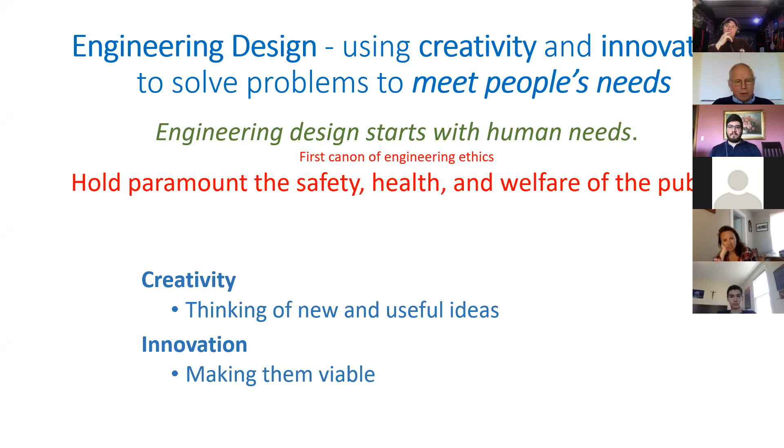Anyway, so we talk a lot about creativity and innovation. Creativity is thinking of new and useful ideas, and innovation is making them viable. I'll try to work or maintain this theme here as we go along.

First, a word about engineering design. Lots of people think that the drawings that we use are the designs. They're just one representation of the design. And the interesting thing for me in looking at design theory is, where do these come from? How do we get these ideas? And how do we develop them into such sometimes intricate drawings?

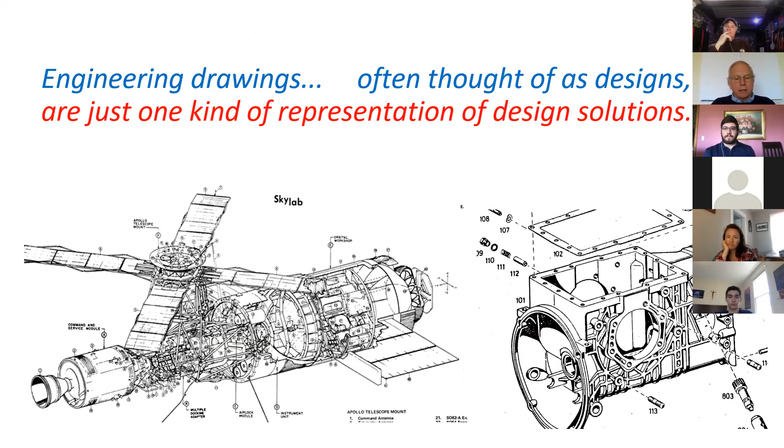So engineering design, it's conceiving, planning, comparing, selecting components and systems. And so engineers create value by thinking. As I point out to my students, we don't really have to do anything. We just sit and think, and then we need to provide some representation of what we've been thinking about, I guess, especially if we want to get paid.

And so thinking about thought, and Descartes: je pense donc je suis. I think, therefore I am. And he comes up with Cartesian coordinates, and he did quite a bit of good thinking. But then thinking about thinking, metacognition. And this is essentially what design theory is. Thinking about, how did we come up with this? And that goes back even further to Aristotle.

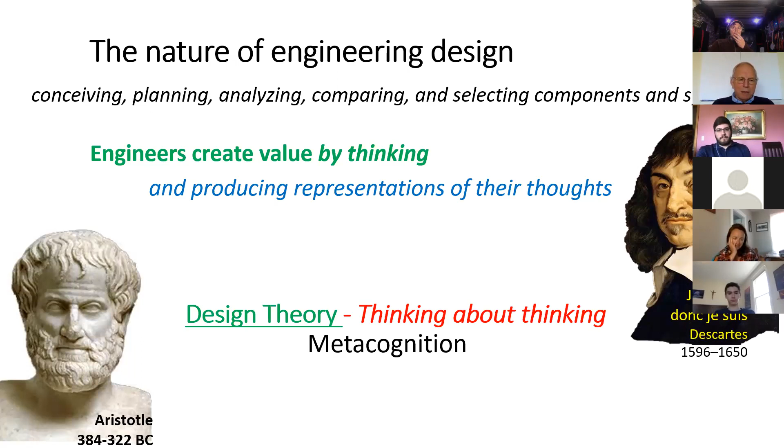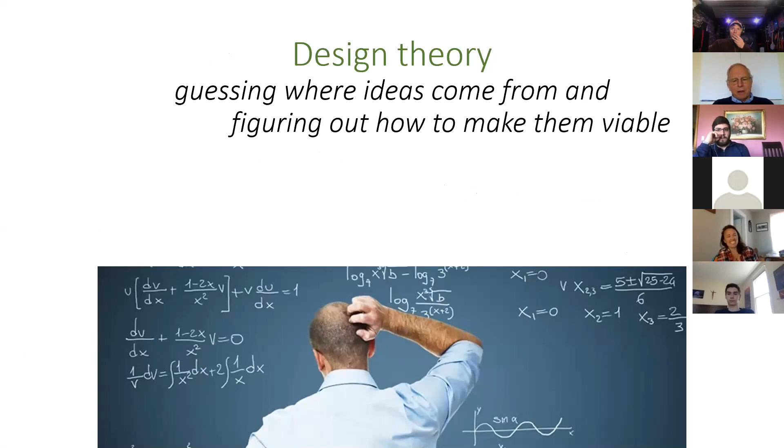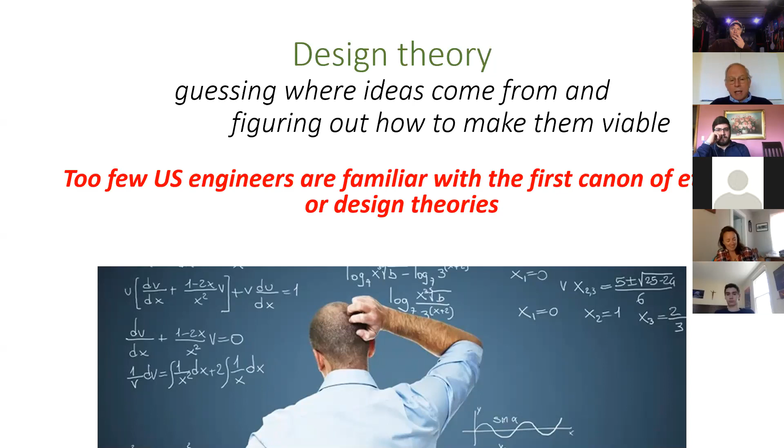So I kind of think of design theory as trying to guess where ideas come from, and then figure out how to make them viable, how to make them work, how to make good innovations. And as I mentioned, too few engineers are familiar with the first canon of ethics, or with design theories, interestingly enough, since that's what it is that engineers do.

So engineering design starts with needs. And it became clear to me, so I coached and have done a bunch of athletics, that we were having way too many injuries when I looked at this book that came out in 2008, Warrior Girls. And the chance of tearing your ACL, if you're a high school girl athlete as opposed to a boy, is 7 times greater doing similar sports like soccer. There's a lot of questions about why, and nobody really knows, but the idea was, let's try to find a solution to this. And here's some statistics on these, and they're alarming.

I think it's like every 2,000 times a high school girl basketball player steps on the court, she'll tear her ACL once. And so that means most high school girl basketball teams are going to have at least one ACL tear every couple of years. And when you talk to people, that seems to bear that out pretty well.

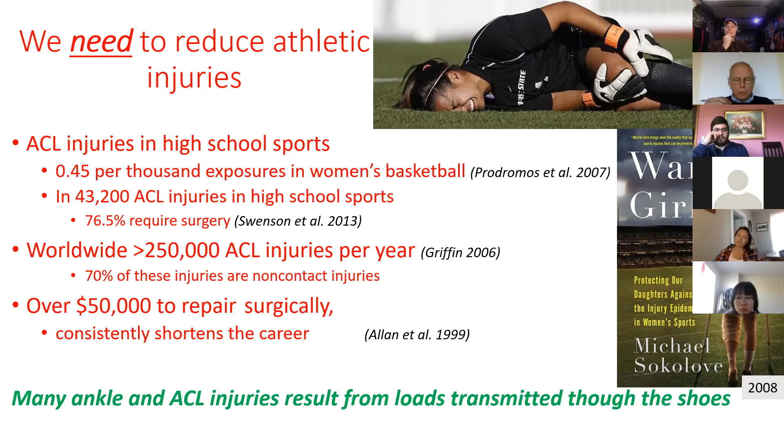So how do these happen? I start thinking about it as an engineer, and many of the injuries occur from loads that are transmitted from the floor or the field through the shoe to the person. And that's where we have an opportunity to do something in the shoe.

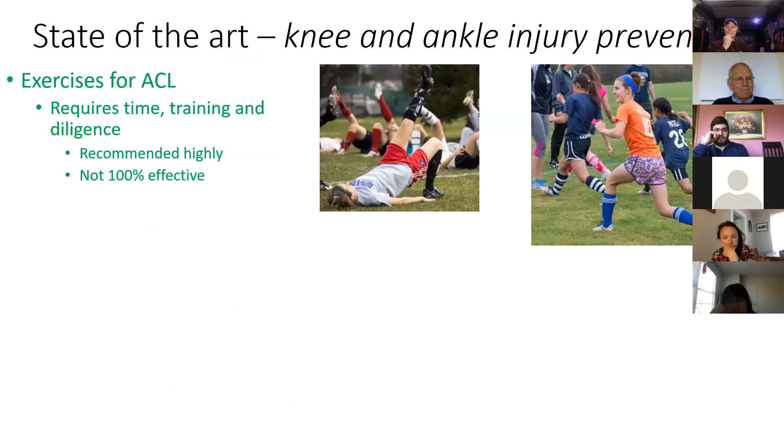But so what else might we do? And so what's going on now? The exercises and trying to strengthen your knee to prevent injuries are a great idea. They work, but you need to do the exercises, and they're not absolute. Ankle supports, and some of these expensive shoes have got all kinds of ankle supports built in, and that's nice, and that can help the ankle, and so can taping.

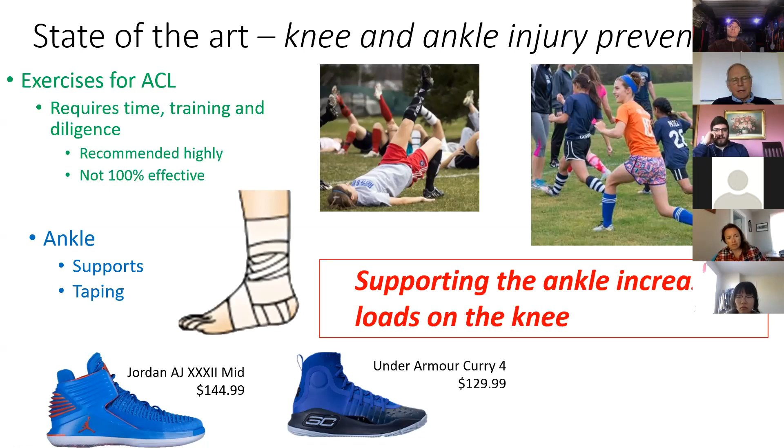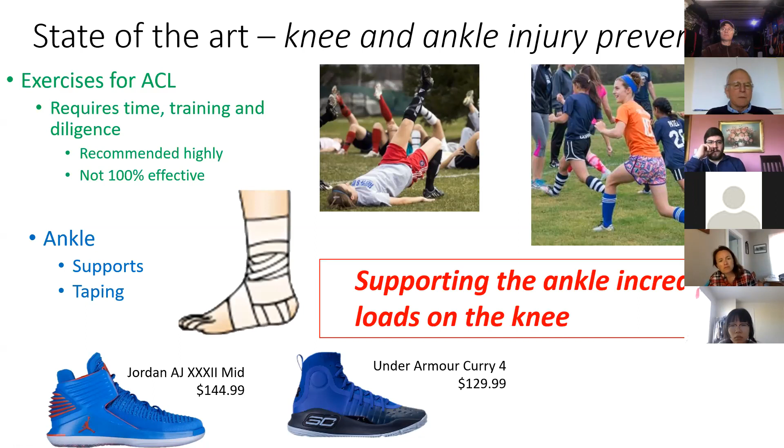But the problem is that as we support the ankle, we increase the loads on the knee. One of the things the ankle does is absorb loads before they get up to the knee. And so it's been noticed that if you tape the ankles, sometimes done as a prevention to keep the ankle from getting hurt, you tend to have more knee injuries. And we see a similar thing in skiing when the ski boots started to get higher now about 50 years ago.

So design theory, I'm going to talk mostly about a different kind, but I want to mention this. These three professors from the École des Mines, or Mines ParisTech, were teaching innovation and design to industry, and they developed this, and I think it's a nice theory. They talk about dividing the engineering design problem into two spaces. One is the concept space.

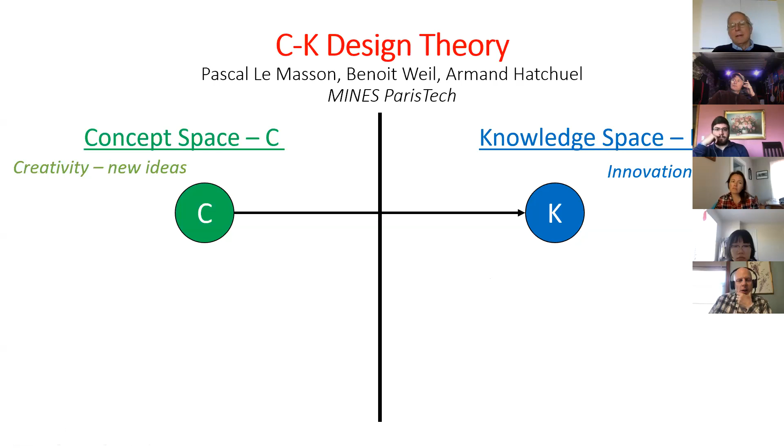So we get some idea as a concept, but then to execute this, we need some knowledge. Sometimes that knowledge already exists and all we have to do is find it, and sometimes we need to develop it. Ideas may have children, and we may need other knowledge to develop this, which may lead to something else, and you get the picture. The main idea is that we have concepts we'd like to use to make products, processes, or systems that are going to be useful, and we need knowledge to turn this into an innovation and make it viable.

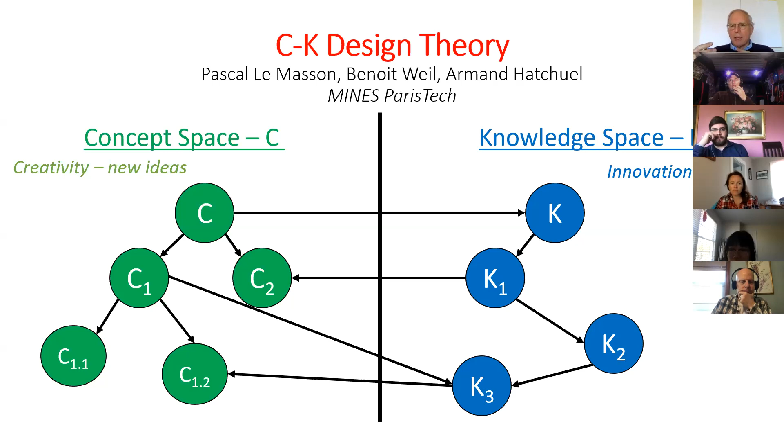So we ask sometimes, where did that concept come from? In the case of what we're doing with the shoes, it comes from ski bindings.

I had the good fortune to work with some guys at the University of Vermont: Bob Johnson, who's an orthopod and is now retired, Carl Ettinger, who's an engineer, and their associate Jake Shealy, who's at RIT in Rochester. They've been studying injuries at Sugarbush North, back when it was still Glen Ellen, years and years ago.

This is an interesting trend here, showing tibia fractures. Starting off, tibia fractures were not far off 1 out of 2,000 days, and there were a lot of them. Release bindings had actually been invented in the late 30s, but there were problems getting them to operate properly. Finally they got the friction out and got everything working, and you can see a dramatic improvement. This shows days between injury on the left and the ski season on the bottom. So now these tibia fractures are very rare and often associated with some clear malfunction in the equipment.

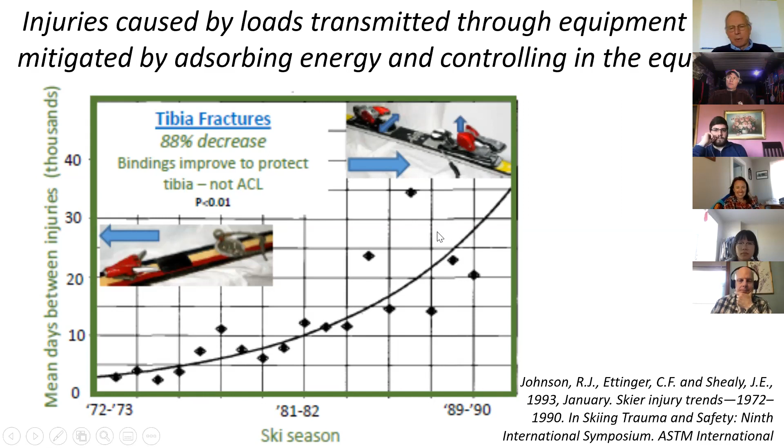The theory that really captured me when I was a graduate student was Nam Suh's. He came to the University of Vermont and gave a talk. Nam was a professor at MIT at the time. He went on to be at the National Science Foundation in charge of engineering, chair of the mechanical engineering department at MIT, and then president of KAIST, which you may not have heard of — it's the number 2 engineering school now in Asia, the Korean Advanced Institute for Science and Technology. Nam was originally from Korea.

His father was a professor at Harvard, and he got stuck in Korea during the war just before he was going to join his father. Anyway, he goes to high school in Cambridge, Mass, then to MIT, then Carnegie Mellon, and then comes back to MIT to teach. He's now retired and lives in Massachusetts. His first honorary doctorate, out of 8 or so, is from WPI.

And the axioms he discovered in the 70s — he was looking for commonalities in good designs. He started with the premise that there should be self-consistent axioms that apply to all good designs, certain things we would use to get the best solution for all design problems. An interesting position, and many people disagree with it — they think no, it's just creativity, we've got to think outside the box, and ideas just come to us.

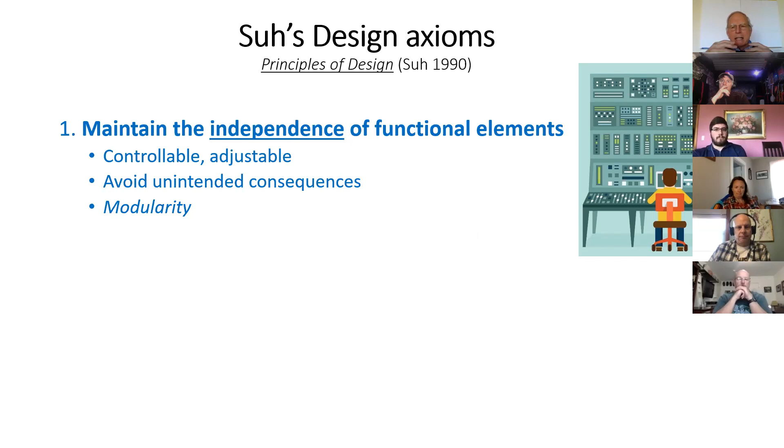So let's take a look at the axioms. These are two things he said are common to all good engineering designs. One is maintaining the independence of the functional elements. Function is important, and we're going to develop this a bit. If they're independent, they're adjustable and controllable, we avoid unintended consequences, and this drives us to modularity in design.

The second is minimizing the information content. Too much information — poor Homer Simpson here is suffering from too much information. Don't confuse information and knowledge; information content is about the probability of success. If there are too many instructions, for example, to accomplish some task, the chance of successfully accomplishing that task goes down as the number of instructions goes up — somebody's going to misinterpret or forget one and not be able to make it work. So the message here is to avoid unnecessary complexity.

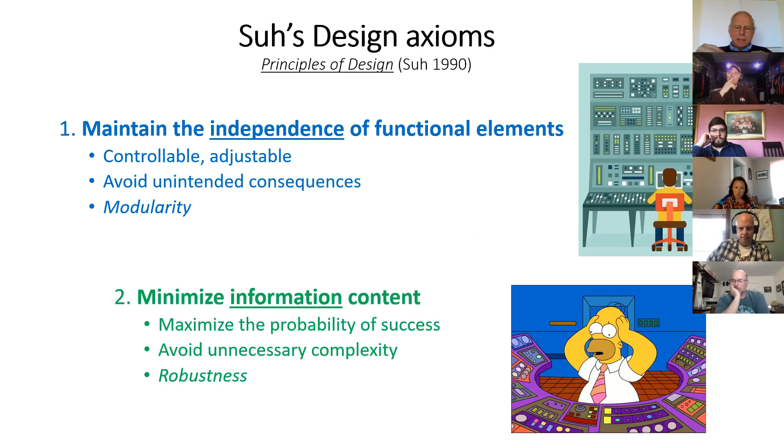Lots of designs have to be intricate because they're doing so many things, and this leads us to robust designs. A lot of people say, oh, those are simple, it's just common sense. Well, if it's common sense, then why aren't more people aware of it and using it? I like this philosopher, Karl Popper, who noted why simpler is better: simpler things tell us more, their empirical content is greater, and they're easier to test.

In order to apply the axioms, we need some sort of structure. Just as if we want to apply Newton's laws, we need a free body diagram, we need some sort of analogy in design. So we like to divide things into spaces, as we could already see from the CK theory. Nam came up with these design spaces, which are quite useful and appropriate.

We start with the customer needs, just as we were looking at the shoe, and we need to do something about all these injuries. Then from those, we derive functional requirements—this is what it does, and these must satisfy the customer needs. Then we go on to design parameters in the physical space—this is what it looks like. The design parameters have to fulfill the functional requirements. We could also talk about the processes, the process variables, so we can manufacture things, but we'll save that for another day.

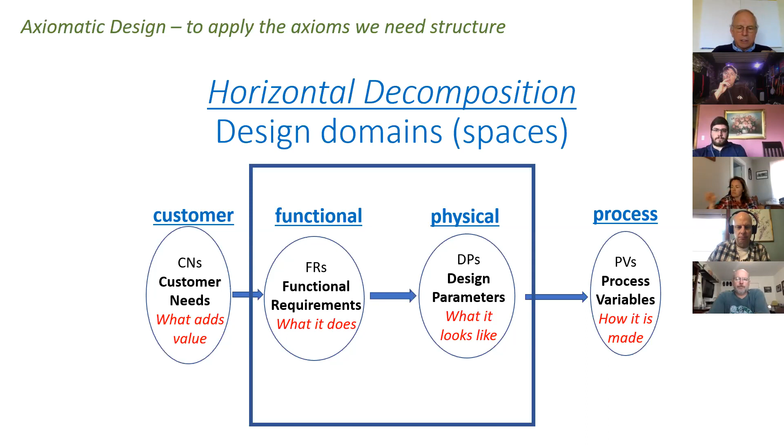Mostly what we want to focus on now are the functional and physical spaces, although we'll get on to customer needs too in a bit more detail towards the end.

Design thinking—we hear about this a lot, and I don't know what it really means when most people use it. But I like to go back to form follows function. This American architect, here's one of the buildings he developed at the end of the 1800s—quite a departure from conventional architecture, which was more ornate and had a lot of aesthetics built into it. This is: let's get the function.

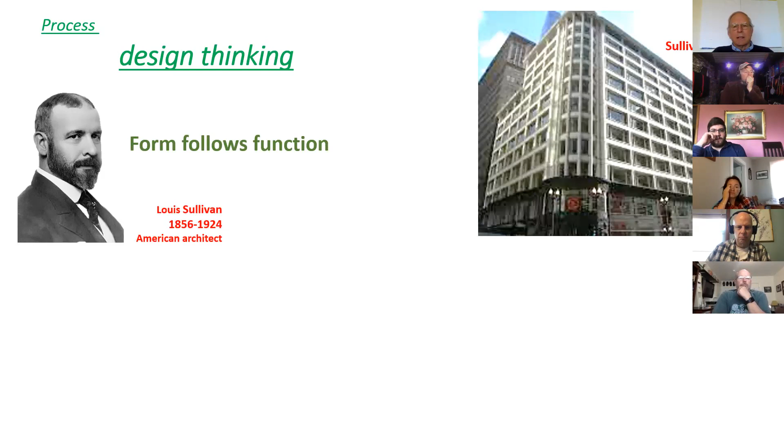Axiomatic design too is form follows function. So we develop the functions first, the functional requirements based on the customer needs, and then select the form, or the design parameters.

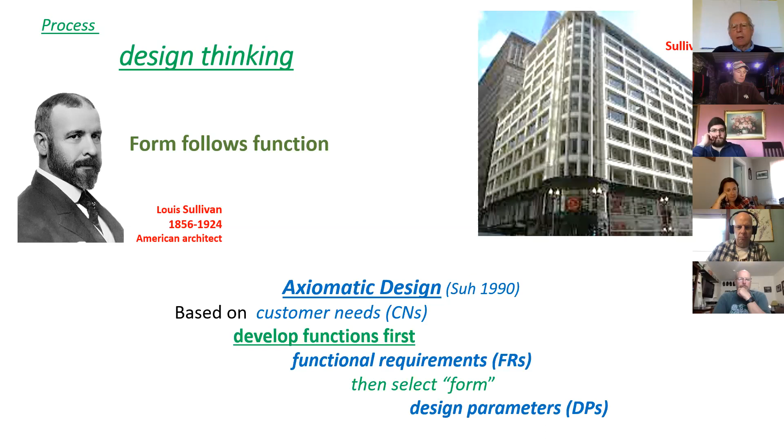So let's get back to our problem with the injuries. There is a need to reduce the injuries, and the cost of these is something like $10 billion a year for high school and college in the United States—almost enough to pay for a pandemic.

The shoe is getting loaded from the movements of the person, and we try to work for better and better traction on the shoes so we get better and better performance. We don't want to mess up the performance, but we don't want to mess up people's knees either. So let's control the load transmission through the shoes so that without diminishing the performance, we can avoid injuries.

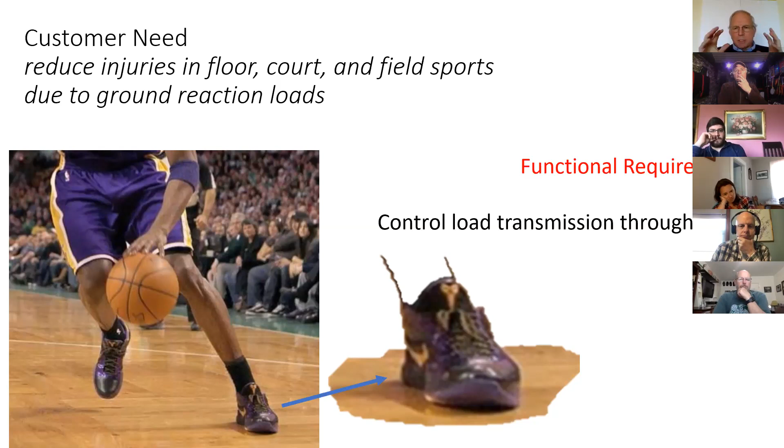Our first FR at the top level is always FR0. So FR0: let's absorb somehow these potentially injurious loads to the knee and the ankle in the shoe.

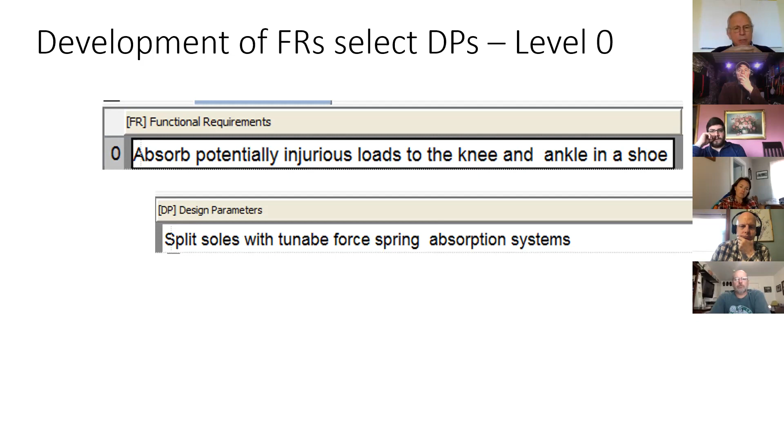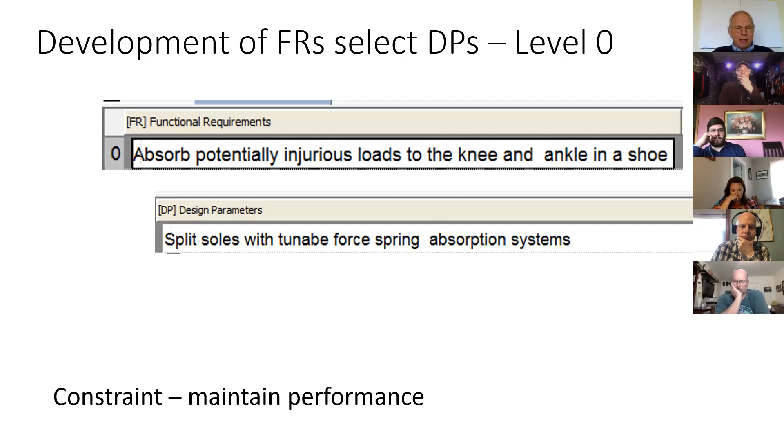What we turn to is a special sort of split sole, so that the bottom part of the sole is for the interface with the court or the field, and the next part is to hold the shoe upper and the foot. In between the two, we're going to use tunable springs. The constraint we have on this is to maintain performance—through extensive experience in athletics, I know that nobody's going to use a shoe, even if their knee is a lot safer, if it diminishes their performance.

A little bit more on the structure: we have these different domains, which is a kind of horizontal decomposition of the design problem. Now we're going to decompose it in hierarchical fashion from abstract to detailed in these parallel vertical hierarchies between functional and physical. So what we're looking at here is a series essentially of parents and children as we decompose, say, FR1 into its three parts, FR1.1, 1.2, 1.3.

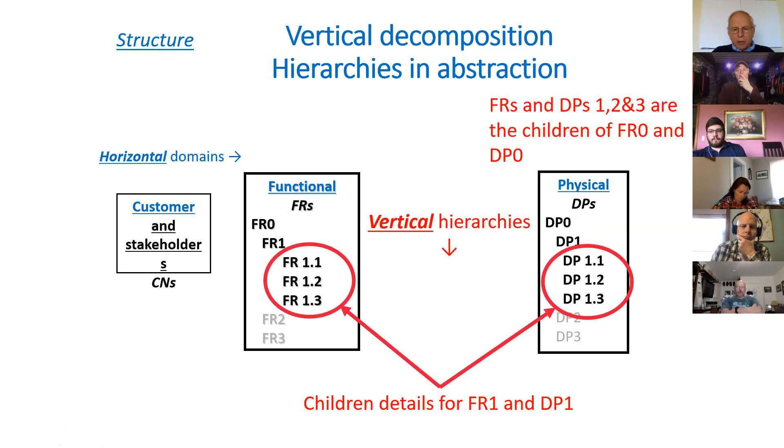In parallel, we have the same sort of decomposition in the physical space, but this is describing the functional space, and this is describing the physical solution to the design problem. So there are the children for FR1 and DP1, for example.

We need some process also for creating this decomposition. Because we're going function first and then physical, it's called zigzagging. First we get the function, then the physical, then we go down to a level of detail and do the next level, function to physical, and so on. We keep decomposing like this until the solution is obvious.

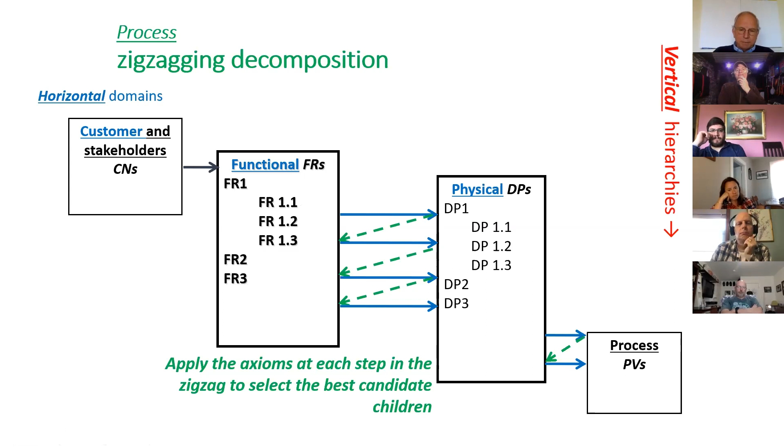So we can look at the decomposition like this, and it's not much different than cutting up a pizza or something that you're going to eat. You can't get the whole pizza in your mouth at one time, so you split it up somehow, and then you split it up again when you bite off pieces of it. So that's kind of what we're doing with the design problem.

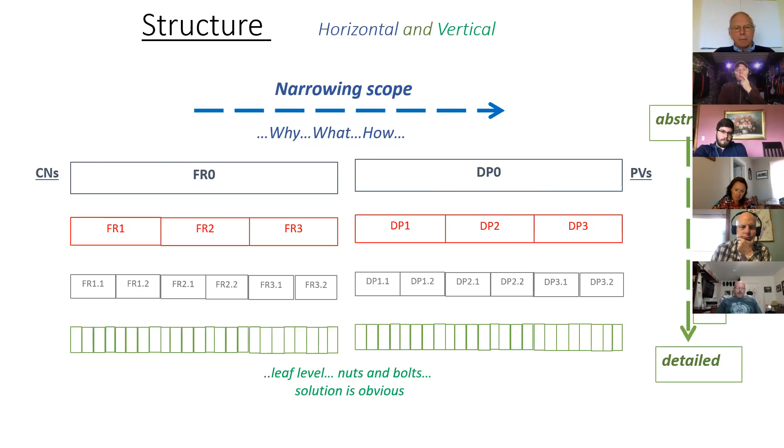This decomposition process is key to doing any kind of problem. I think it should be something that is taught from a very basic level, but we don't. But sometime we should. Now, there's lots of rules that help us in the decomposition.

Lots. There's a few that are good to remember. One is when we're talking about functions, they start with verbs and they're stated in the imperative. So it's a command. So you need to do something, accomplish something, provide something.

And we would like the minimum number that we need to satisfy the parent, or satisfy at the top level the customer needs. So we want to make sure we think of everything. So the decomposition should be collectively exhaustive. When we take all the FRs together, we should have the problem solved at each level of detail. And at each level of detail, the FRs should be mutually exclusive, so there's no overlap or redundancy. So we have a good, clean, full decomposition, but no more than we need. And the little mnemonic is C-M-min: collectively exhaustive, mutually exclusive, minimum number.

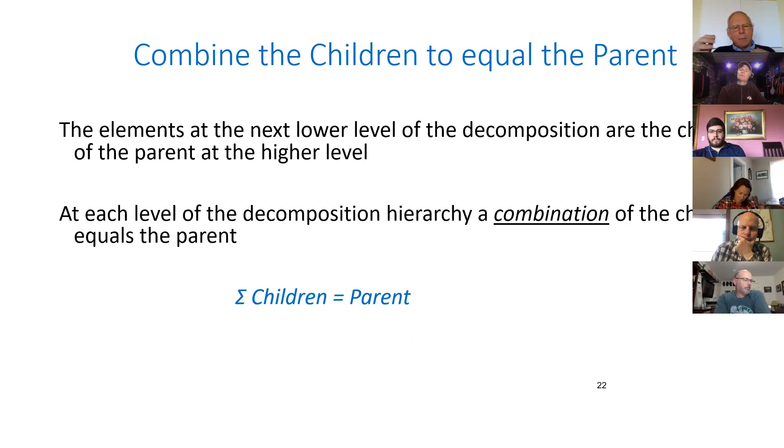We also, in the decomposition, another way of thinking of it is we want to somehow be able to combine all the children to equal the parent, exactly. No more, no less. This would mean we have a good decomposition. Now, I have a summation here indicated, that the sum of the children equal the parent, but it's any kind of combination, doesn't have to be a summation.

So concept. So going back to the concept knowledge from CK theory, from our friends at the École des Mines. So split soles are going to be embedded with tunable springs that will control the ground reaction forces. So this is going to mitigate the loads on the knee and the ankle, even with ankle supported taping. So we can avoid putting the knee at more risk by when we save the ankle.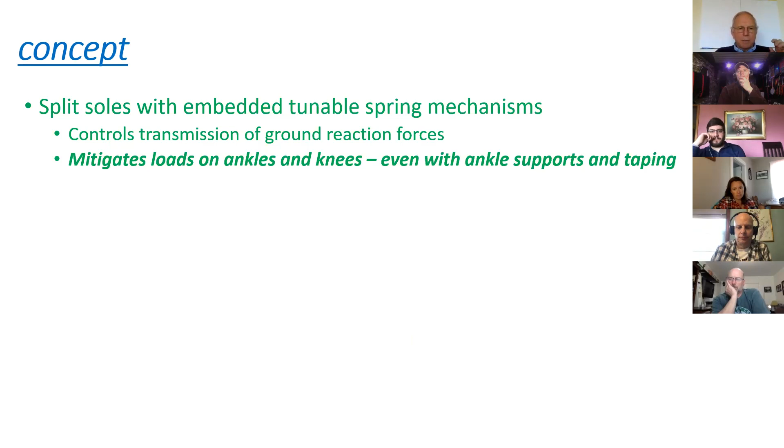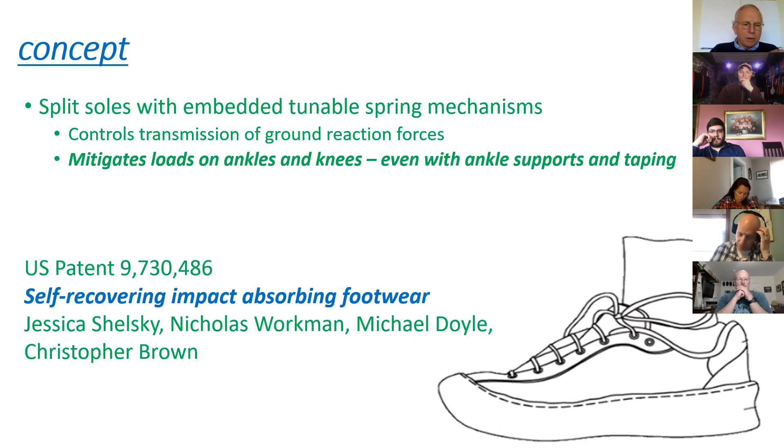So we started on this problem not long after that book came out with a team of undergraduates working on their MQP, major qualifying project, which is what WPI calls the senior thesis in engineering. So in undergrad, for the undergrads. And these three did a great job. And so we filed for a patent.

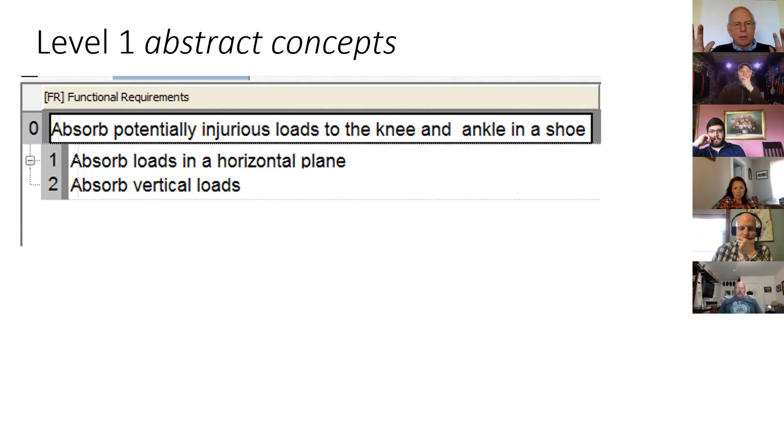And so here's a little bit more on the decomposition. So functions first. We want to absorb the loads in a horizontal plane, and we want to absorb the loads in a vertical plane. Because we look at videos of the injury, and lots of times somebody's coming down from blocking a shot or something and trying to make a cut, and that's when they injure their knee.

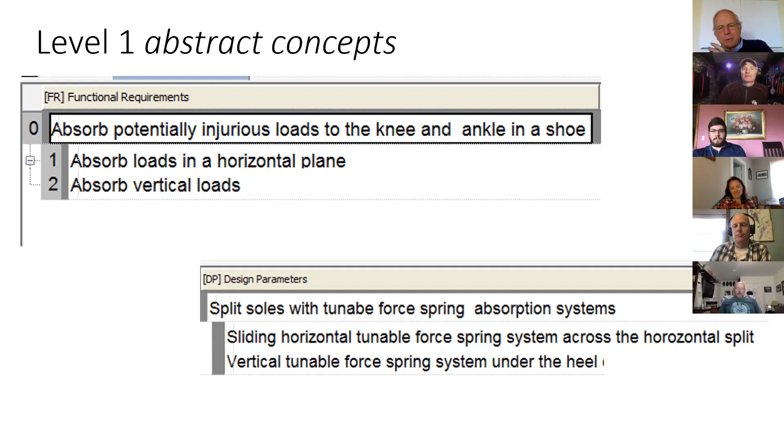So the physical solution is these sliding horizontal soles with tunable springs. And so we have these horizontally, and we also have a spring system vertically under the heel. So the idea is we should be able to absorb in both directions, or both senses, horizontal and vertical. So here are some frames from a video of the prototype that we made for the MQP.

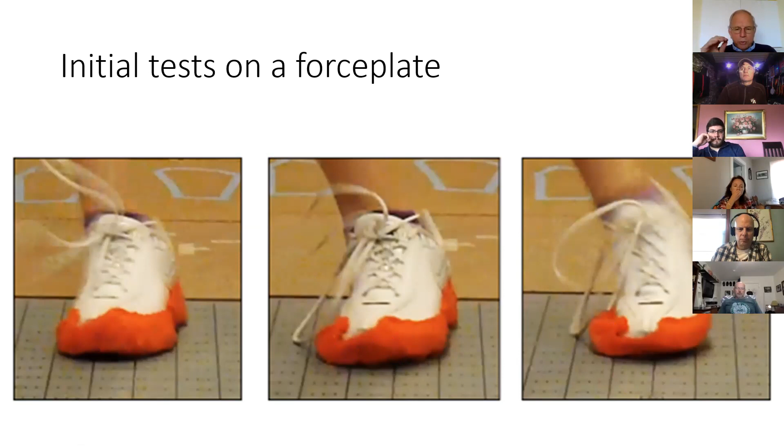But this got put on hold for a few years. We tried to sell it to shoe companies. And the established companies seem to be a little bit risk averse when it comes to investment in new technology. Not just the shoe companies, most of the big companies are. We could speculate on why, but anyway, it happens.

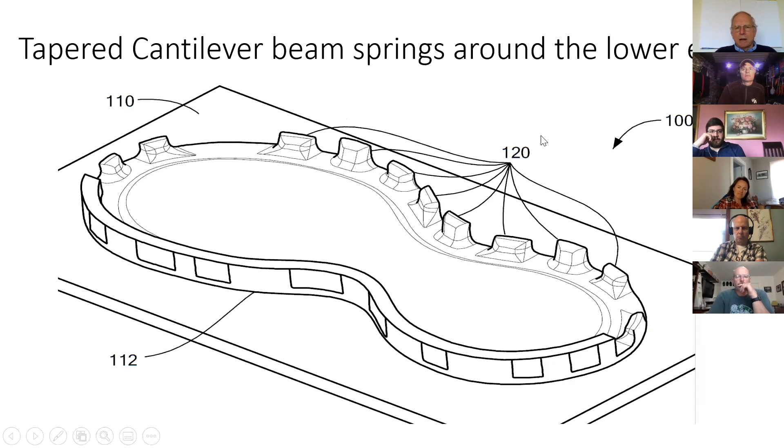And so these would get pushed over in different fashions. This is a drawing out of the patent, and it's terrible. It shows a sharp corner there that should be rounded. This thing's supposed to be bending over.

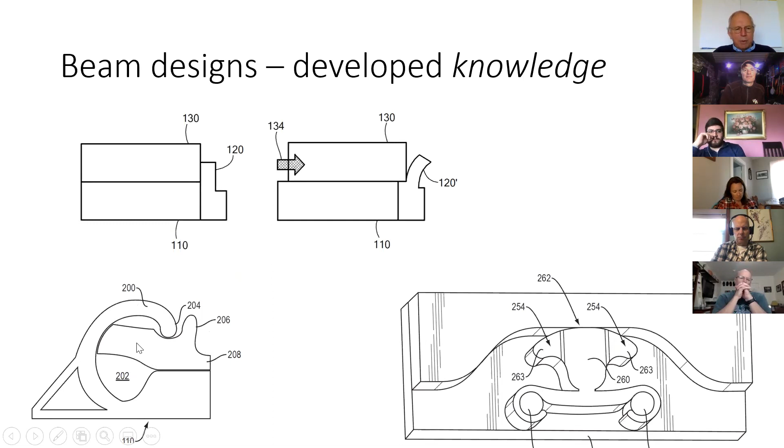But here's the problem, and we needed some new knowledge. Conventional springs are linear. This goes back to Hooke's law. Hooke was, I've forgotten what century, but it was years ago. He discovered when you pull on most things, they stretch a little bit in a linear fashion.

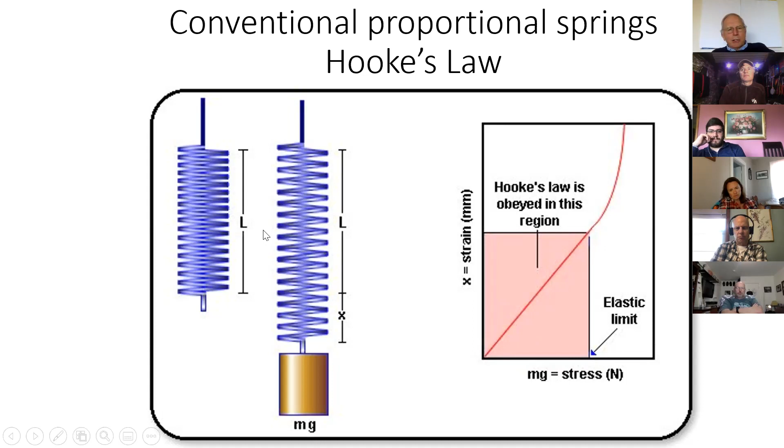So this is a coil spring, but it could be any kind of spring, or it could be just a wire, and you put some weight on it, and for a while it will deform what we call elastically, and then spring back. And then either the spring stretches all the way or bottoms out, and the loads start to go up.

So if we think about this in terms of our problem here of, let's say, reducing the risk of injury and still being able to do ordinary play, let's take a look at a plot of the load here. So this could be a force or a twist, and the displacement, which could be linear or angular.

So if we look at the load levels, there's a certain level that we need for most ordinary play. And then above that, there's some load where we start to have some significant risk of injury. We know they're oriented like this because most of the time we go out and play without getting hurt. Otherwise, we wouldn't do it.

So if we look at a linear spring, a Hooke's law kind of spring, the load is equal to some constant times the displacement, and it just goes up like this. And this would be all kinds of springs like on a pogo stick. I don't necessarily want a bouncy kind of feel.

And so like ski bindings, preload the spring so that it doesn't start displacing until I get up to some pre-adjusted load, say L0. And then I'd like to kind of flatten that out so I've got a longer time before I start risking injury. And if the ski binding's working properly, it'll release somewhere in this window before we actually get hurt.

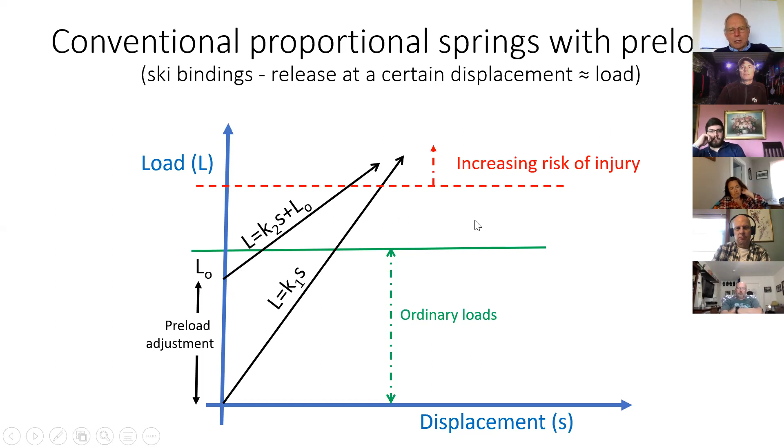Now, what we would like more than this would be to have a spring that goes up and then flattens out somehow. So we would like a nonlinear spring, because this is linear where it just keeps going up. So this would provide us better protection.

And if we can double the displacement, this comes out of a kind of work energy formulation for those of you who are taking physics and mechanics. So if we can increase the displacement, say S, by a factor of 2, we can reduce the forces that are necessary... in the energy, let's see. If we double the displacement, we can reduce the forces essentially, and provide more protection.

So what's happening is some initial linear kind of displacement, perhaps, or stiff load, so that we can make the different maneuvers we want to when we're playing. And then we want to get into a protection mode where we're able to keep loading at a safe sort of load so that we don't have a release.

If you had a release, you say, uh-oh, we're approaching a dangerous thing here. It would be like you stepped on a banana peel and you'd kind of skid out. So what we really want is something that'll allow us to maintain an approximately constant load at a safe level, and then absorb as much as we can, keeping the forces low, and then recover when we pick up the foot. So whenever what we're doing is over, and it will get over because we can only extend our legs so far, and it'll recover before the next step.

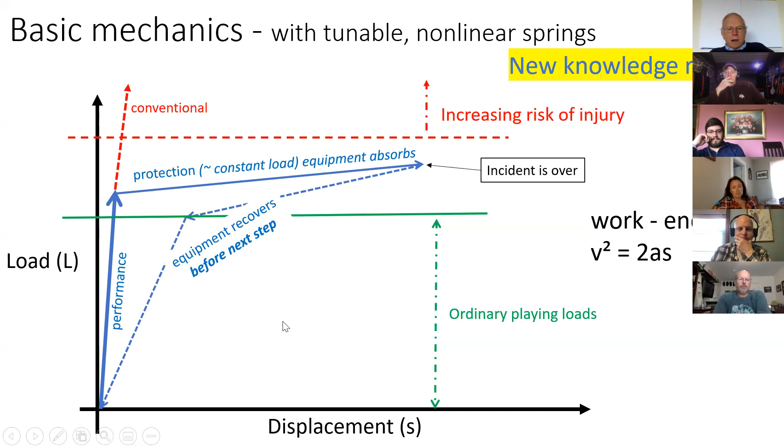And we may not even know that the shoe has saved our ACL. Actually, we prefer that we didn't really know, so that we can go on playing without any interruption.

So we can look at the work here that's absorbed and come up with, if we can double the displacement, we cut the force in half. And actually with this kind of shoe, since nobody's paid any attention to horizontal displacements like this, we can do better than doubling it.

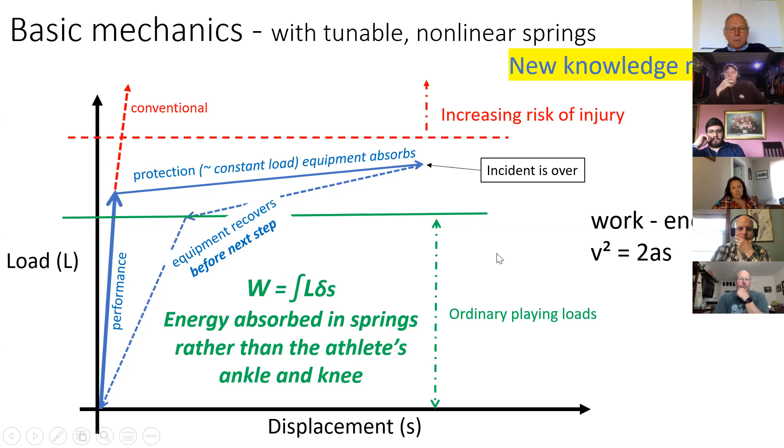We can also look at an impulse momentum kind of formulation. This is the integral of force times time, and we're changing momentum when we change direction. So if we use some sort of tunable spring system, we can reduce the load, as I've shown, and give a little bit more time. The times are still milliseconds, but this can be enough time perhaps to respond, turn your muscles on, and save yourself from injury.

So same impulse momentum with the tunable springs, lower force, longer time.

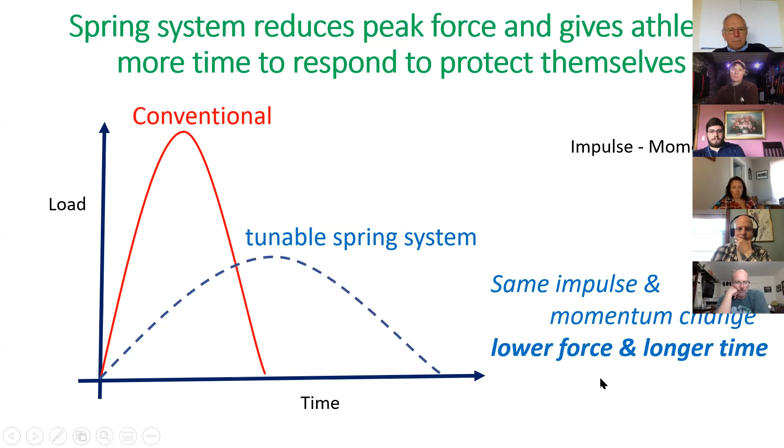So let's take a look at our first branch, and we need to find some sort of system for absorbing the loads and to decompose this. So we'll decompose it in a way that Descartes would like: fore, aft, medial, lateral, and then forefoot, heel, and also different diagonal loads, and rotational kinds of loads. We're trying to be collectively exhaustive for all the loads we have to think of, and mutually exclusive because these all have special directions.

It turns out that this is tough to achieve absolutely, but it isn't tough to be better than what currently exists because nobody's trying this.

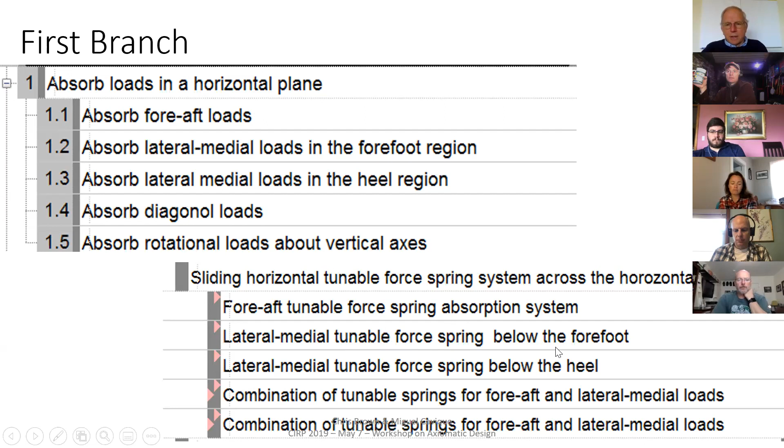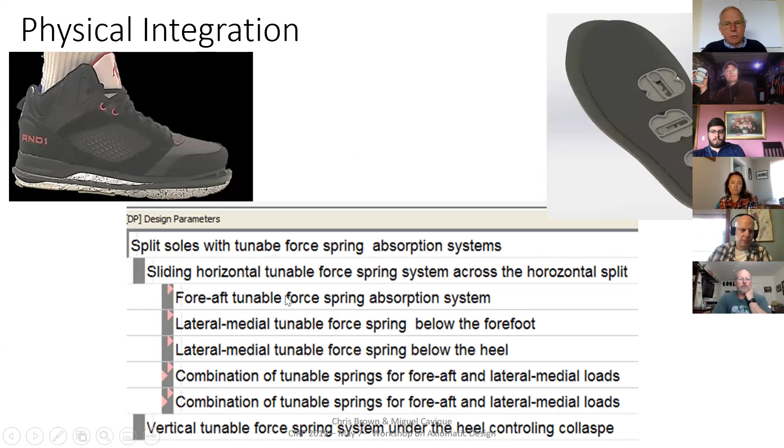So here's an example from a couple of years ago, how we were doing it. One of the things we want to be able to do in a good design representation is to point to all the physical aspects and figure out what the design intent was. In other words, what function are they fulfilling? And this is very often, most often, not recorded with the design. So this causes problems.

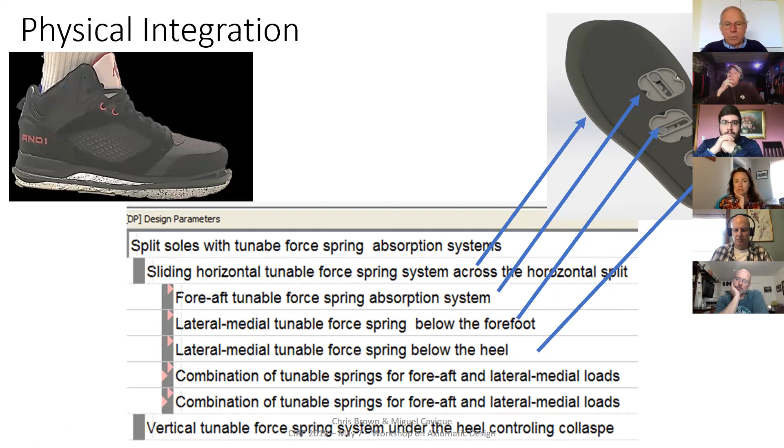We could build another Saturn V moon rocket. We have all the plans. We can't change it because we don't know what the design intent is, and we would have to somehow reason that out. Well, it turns out these nonlinear springs are not very common.

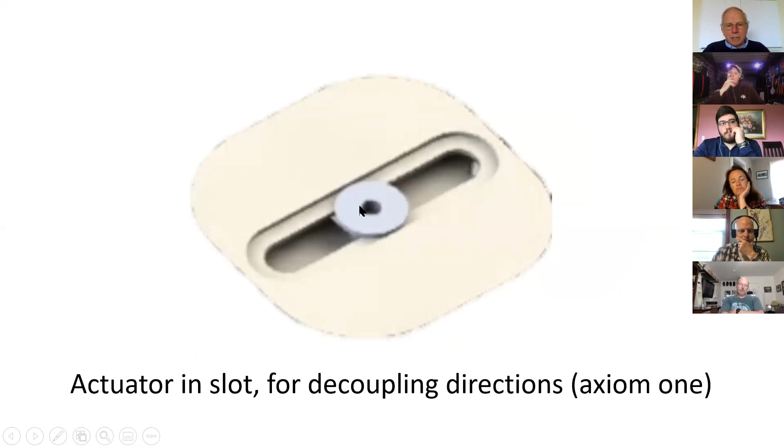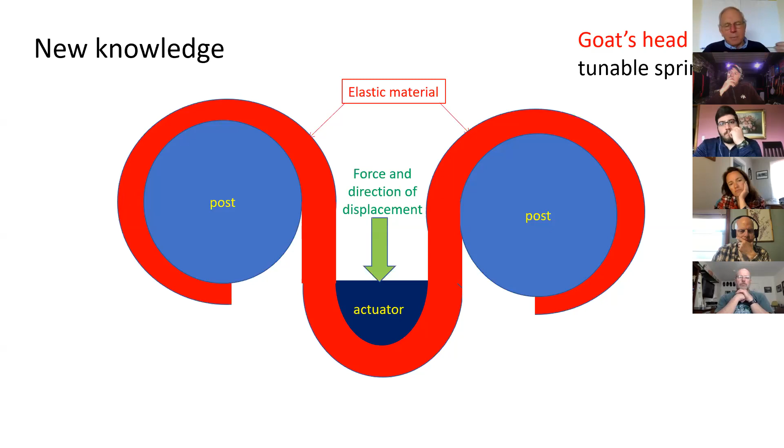Now, the other thing we need to do is have it work in all directions independently of the others. And so this is a little device, an early embodiment of this. Later we figured out this has got to be circular so it can rotate. But this little slot here allows that actuator in the middle of the goat's head not to react, not to be moved fore and aft if this is the medial lateral actuator.

All right, so here you can see some physical integration work that we did. And here you can see the little parts of the goat's head, and here they are over here too in the photograph. We started making much better progress on this when we bought our own 3D printers and sort of had control over them. WPI has lots, but we needed some dedicated in the lab, and so we got those.

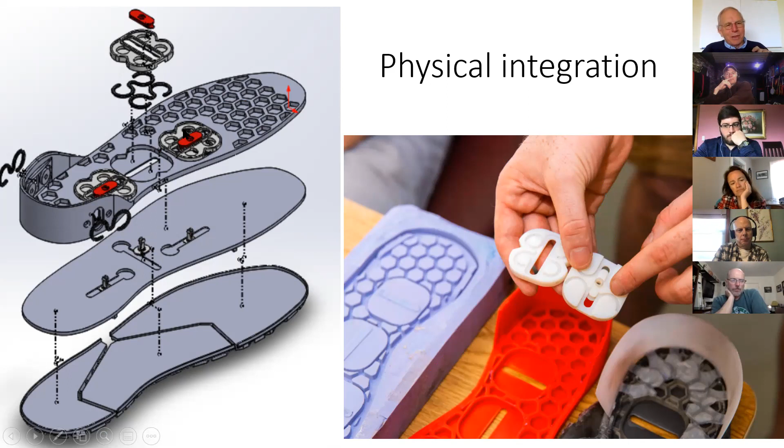And here we can see in the heel, here's the vertical goat's head, and those act just in one direction in this embodiment, whereas these two here are going to be turned, and these should be the fore-aft ones at this point, and these should be medial-lateral and toe and heel, but somebody got that wrong.

All right, so in any event, we're looking for other ways of doing it. We need other solutions, and this is what we call the actuator in the elastic field. So what we have is an elastic field with a stiffer kind of actuator in it, resting like this and sitting in a little pocket. Then when it gets displaced, it compresses the elastic field a little bit, and the elastic restoring force. This is kind of like pinching a watermelon seed and getting it to move.

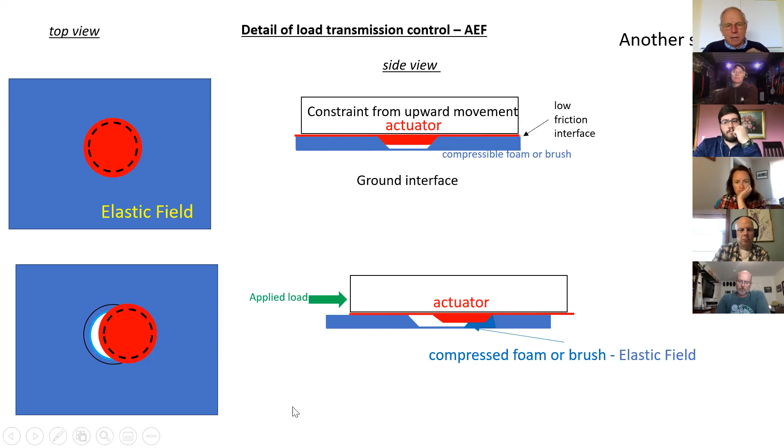So it'll react to the applied load, and depending upon the shape of this and the way we do this, we can get different kinds of responses. It could be a foam or a brush, but some kind of elastic field that the actuator moves out into.

So when we want to take a look, especially to see if things are coupled, we can make a matrix like this. Up here we've got the physical solutions, the design parameters, and down here we've got the functions. The X's indicate that there is an interaction. The diagonal X's are the ones that we really want, and the off-diagonal X's are causing some coupling that we know we're going to have to deal with because they're giving us some problems with axiom 1.

And because we don't have separate springs for diagonal and rotational, we're having some interactions here with the fore-aft springs and the medial-lateral, because these have to do sort of double duty so that we don't have to build up more layers. We have a constraint where we need to keep the thickness of the sole reasonable, and we can't put in a separate layer for doing diagonal and a separate layer for doing rotational. So that's the origin of that coupling.

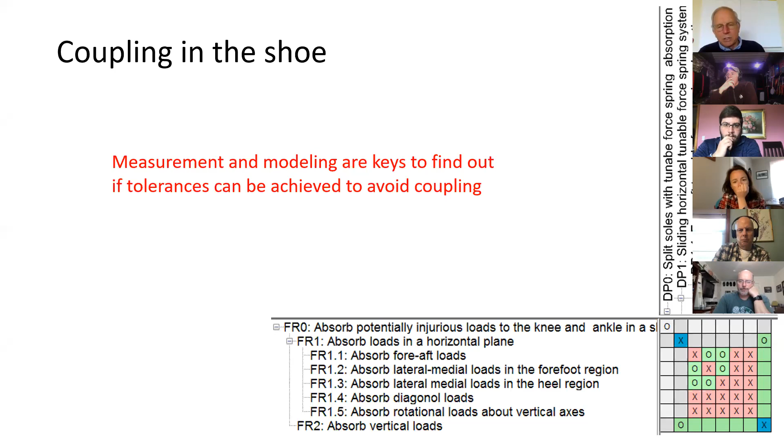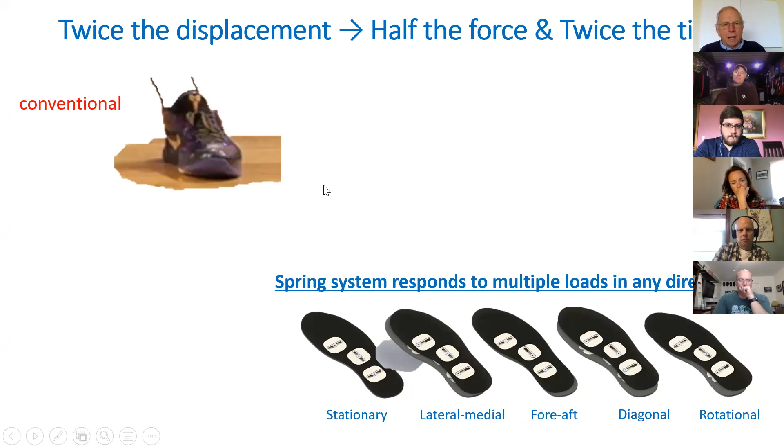So as I was saying, twice the displacement, we get half the force and twice the time, and we can do more than twice. So conventional, and then here's the prototype on the force plate.

Yeah, we had to come up with some other solutions than these cantilever beams around the outside, because unfortunately we're using an orange band here, and the investors were saying we're mentioning some similarity with Ronald McDonald's shoes, which was obviously not going to be a good selling point.

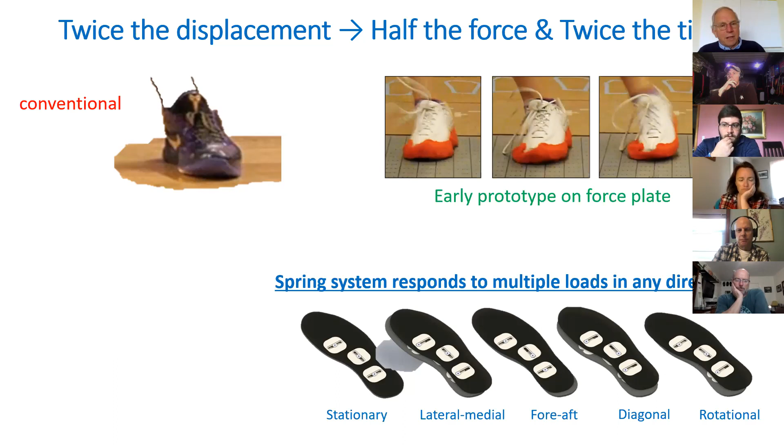And we were so fortunate, and I've got to mention sports engineering, that was in the lead slide, and I forgot to do it there, and I forgot to point out the knee. Sports Engineering Inc. is a startup that our investor began to support this project, and we've had good fortune to have wonderful investors who are very patient as we think of better ways of doing things, integrate them in the shoe, and improve the final product. They're understanding very well that this takes time, and nobody had a tunable spring before.

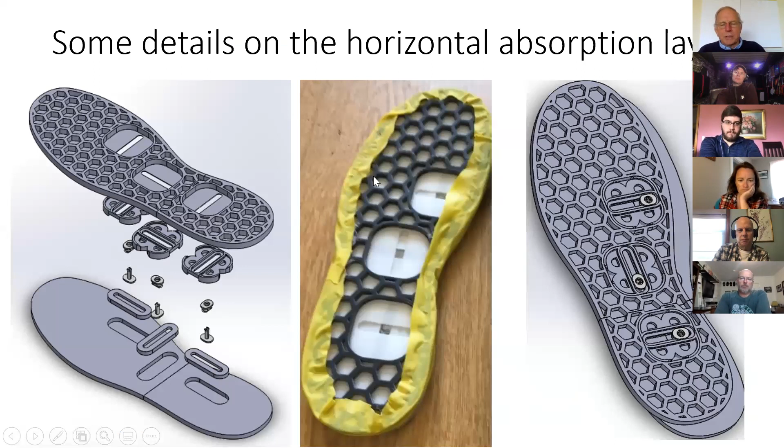Anyway, so there we've seen that, I think. So here's some of the integration steps that we have putting everything together, and here's some points here that we could use.

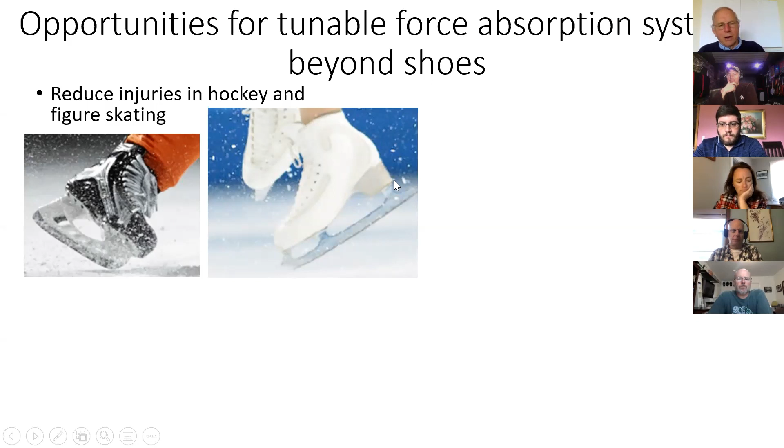We've also got a patent now that we've applied for on skates. Actually, we have an existing one on figure skates to absorb loads in the heel, because if you miss your jump and land on your heel and don't absorb it well with your knee and your ankle, you can get a severe bruise that'll keep you off the ice for a while.

The investor actually came to WPI. His investment strategy is looking for undervalued intellectual property at universities, since schools are not that apt at developing their intellectual property. So he came and he'd seen our patents on ski bindings.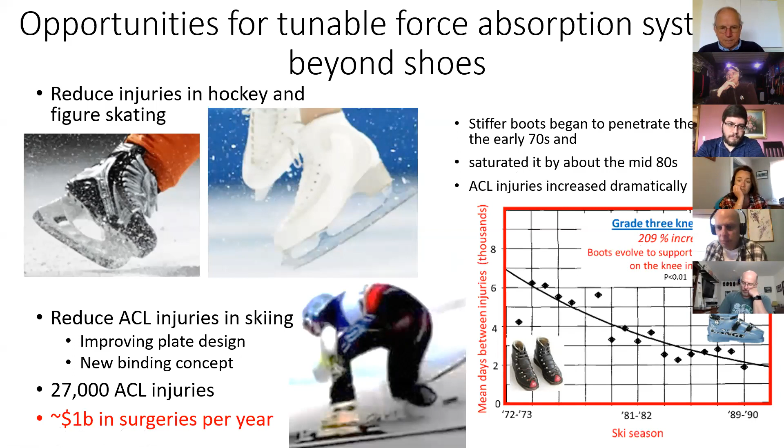All right, so there we have some design activity and some solutions that we've worked out and how we put this together. Let's think about what we did.

Let's think about thinking for a moment. So design, philosophy or a science? We're using the term science here in the sense that a scientific discipline is one that has a few simple, self-consistent laws or axioms that we can apply to a wide variety of problems, like Newtonian mechanics.

It's interesting in this development that I read about in the New Yorker, I recognize that what I'm doing is sometimes thought of, as Adam Kirsch describes it, before it's really had a chance to solidify and form a scientific discipline.

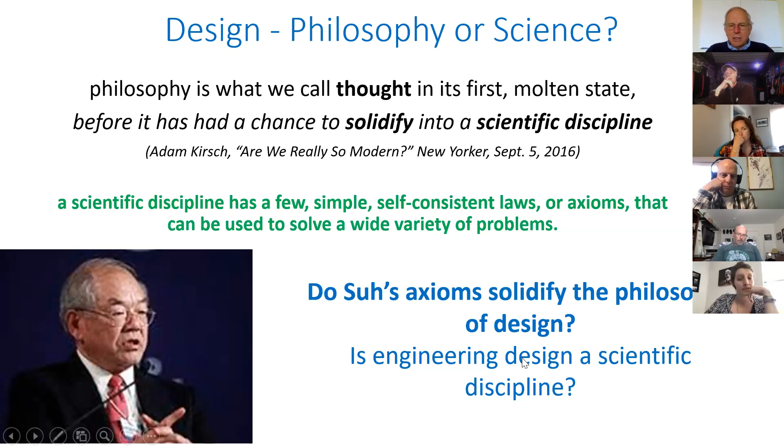So if we look at natural philosophy and what existed before Newton started to transform the way we think about the world—are Suh's axioms solidifying a philosophy of design and making engineering design a scientific discipline? I would say yes, but I leave the question open.

Let's consider customer needs. Design problems start with a need. Henry Ford is supposed to have said, if I'd asked people what they wanted, they would have said faster horses. So we have to be careful how we interpret needs, and make sure we haven't limited our solution space. If Henry Ford had just asked people what they needed, he would have probably been an unknown horse breeder in Michigan.

As it was, he realized the fundamental need is transportation, and how can we supply this in a better way. It's interesting how much time it took him to develop this—the Model T was not where he started in the alphabet.

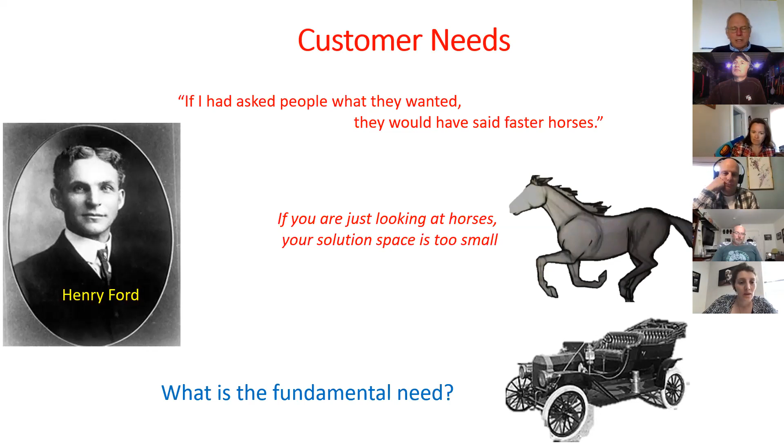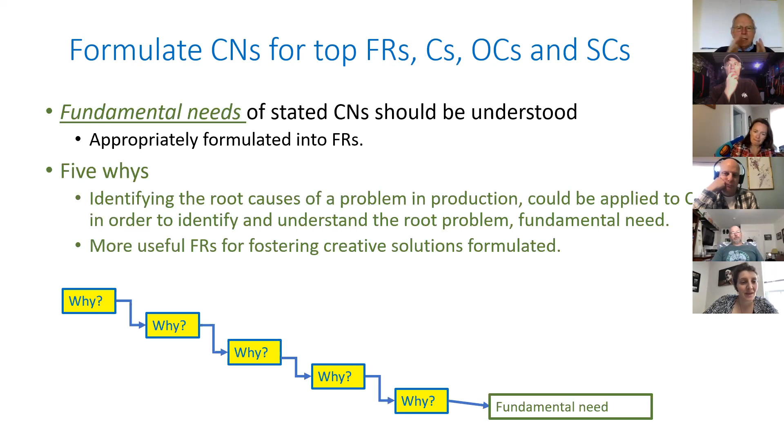Anyway, from the customer needs we need to formulate what our functions are. We need to understand these well. Here's a hint: when you think you've got a need, ask why. The Japanese developed this in manufacturing and solving problems—ask why five times. I'm not sure why it has to be five, sometimes one or two times will do it, and you think, I'm at my fundamental need now. When you get to the fundamental need, you've got more possibilities for solution.

But as we're wrapping it up, let's design a future for a planet with a future. Let's try to leave the Earth better than we found it. And let's keep the first canon of ethics in mind: hold paramount the safety, health, and welfare of the public.